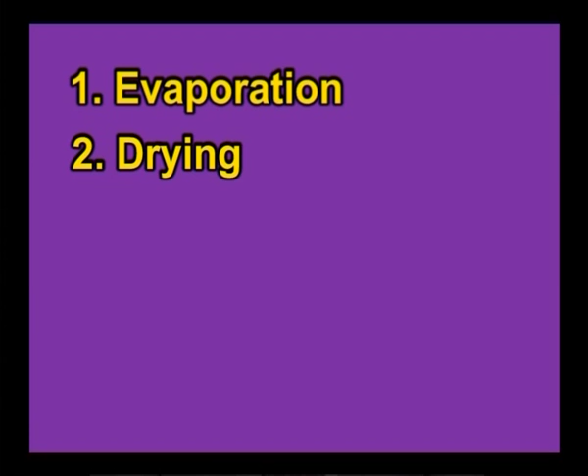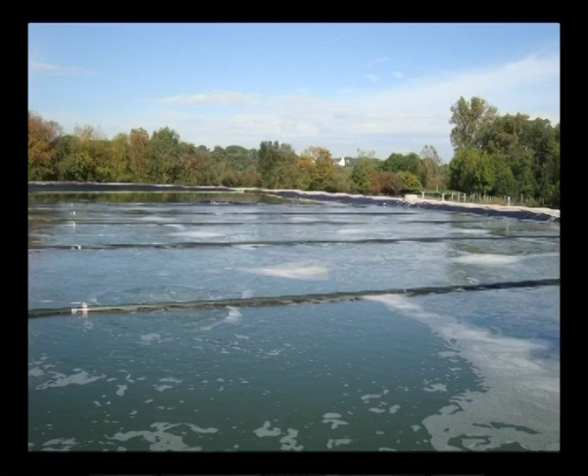Let us understand both the topics in this session in the following headings: evaporation, drying, thermal conversion, incineration, cleaning of flue gas and solidified outputs. The first topic, evaporation. Evaporation is a method used to concentrate non-steam volatile wastewater components. The evaporation plant contains a vapor condenser by which vapor and steam volatile compounds are separated from the concentrate.

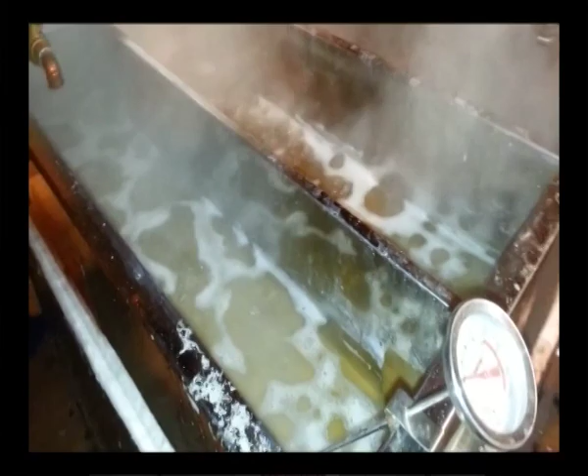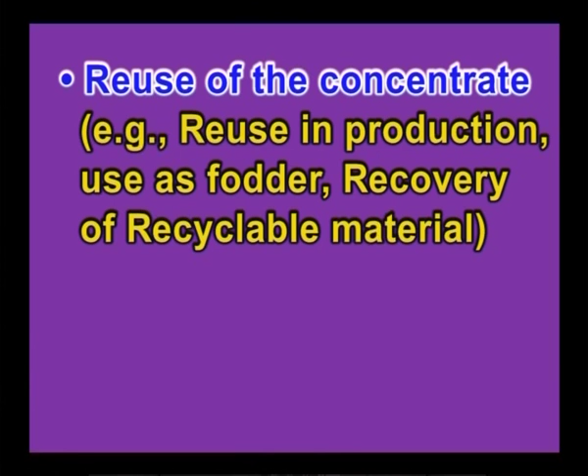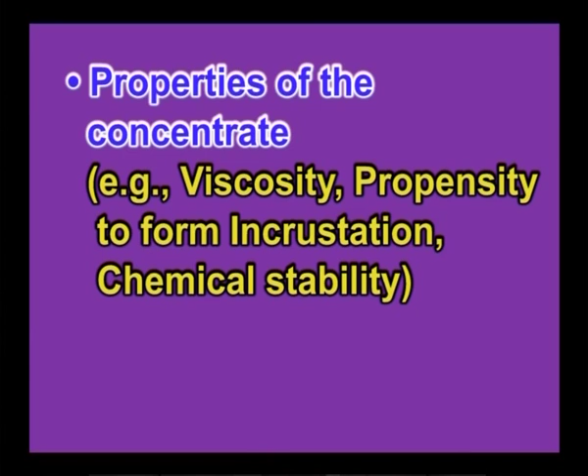While the concentrate is then recycled into the evaporator, the exhaust steam can be used for indirect heating of other evaporator stages. The degree of concentration of the wastewater components depends on different factors. For example, reuse of the concentrate, such as reuse in production, use as fodder, recovery of recyclable material; type of disposal of the concentrate, such as incineration or landfill; properties of the concentrate, such as viscosity, propensity to form incrustation, chemical stability.

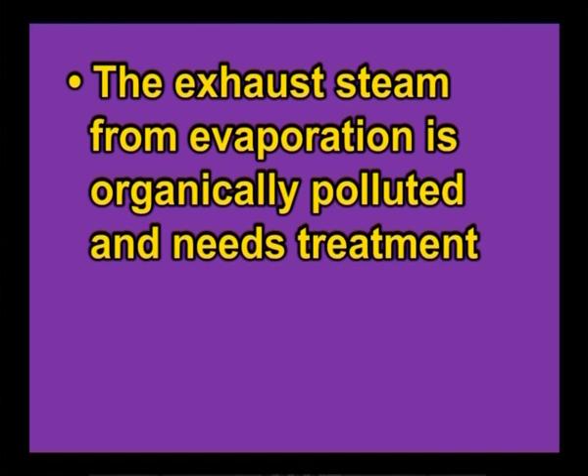Advantages of this method include: the residue can be reused as fodder and fertilizer, only a small area is needed, exhaust steam can be reused as energy, and it is considered state of the art in the food industry. Disadvantages of this method are that the exhaust steam from evaporation is organically polluted and needs treatment, and rather high operation and maintenance costs.

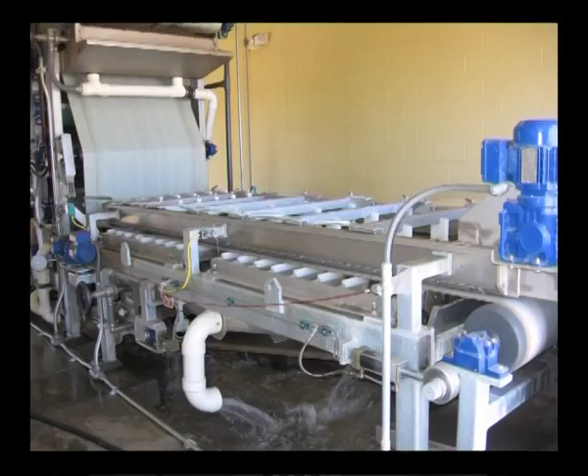Drying. Drying of a food material occurs when water vapor is removed from its surface into the surrounding space, resulting in a relatively dried form of the material. Drying differs from the dewatering process. In dewatering, liquid water is drained or squeezed out of the material. But during drying, the heat can be supplied in different ways: convection, radiation, conduction, microwave, radio frequency, or even joule heating.

The principle of drying, no matter what drying mechanisms are involved, can be generally expressed by the following surface vapor flux equation: N''v = hm (ρv,s − ρv,∞), where N''v is the vapor flux measured in kg per meter square per second, hm is the mass transfer coefficient measured in meter per second, ρv,s is the interfacial vapor concentration at the moist material surface, and ρv,∞ is the vapor concentration in the surrounding space that vapor travels into, measured in kg per meter cube.

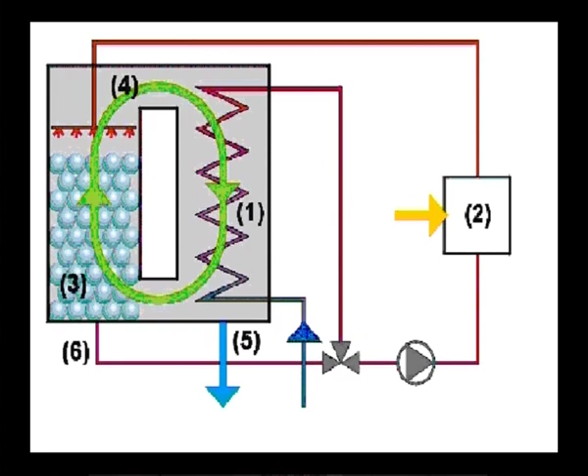hm is determined by the flow field around the material being dried, in meter per second, which may be viewed as a velocity of mass movement. When this vapor concentration difference is positive, vapor leaves the material and thus drying occurs. The reverse is the wetting or humidification process. The drying process as a whole has to involve the generation of vapor, transforming from the liquid phase in the moist material to the gaseous phase, on and within the moist material being dried, and the transport of the water phases towards outside of the material.

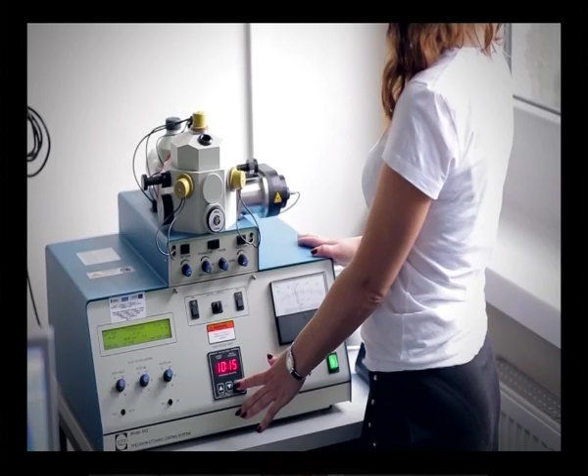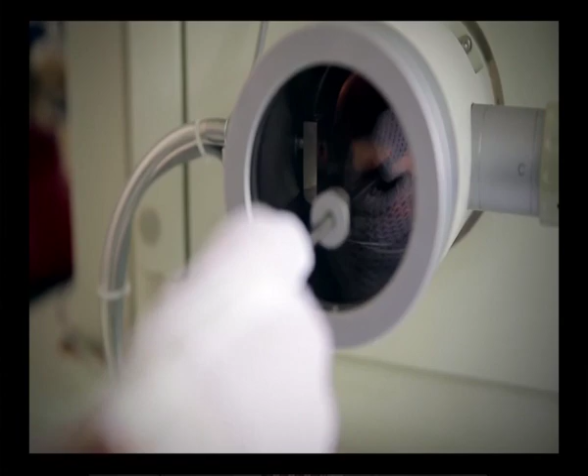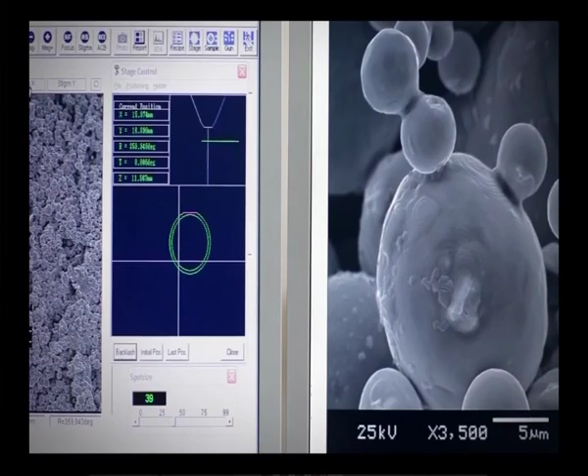Some debates are around how liquid water may move within the material structure. The microstructure of the food materials is particularly relevant to drying, as both liquid water and water vapor move within the structure. The microstructure, as far as the transport of heat and chemical species is concerned, is mainly made up of compounds such as protein, fat, carbohydrate, minerals and air. Porosity and tortuosity are usual characteristics. The material's composition and its affinity to water play a key role in water holding capacity and local evaporation rates.

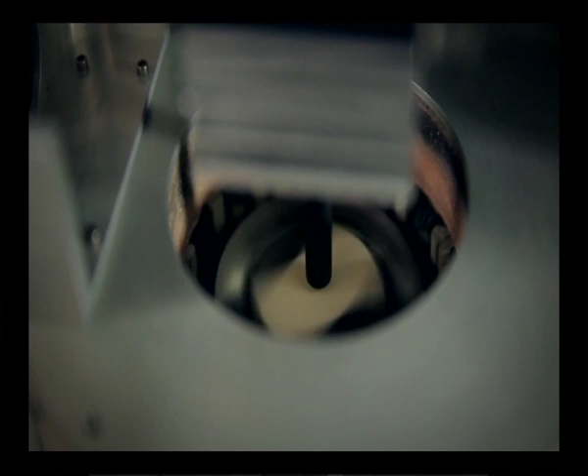Drying also creates a new microstructure as it progresses, and the spatial distribution of the microstructure characteristics, density included, is important in texture perception of the product and affects how it may be used as an ingredient for mixing into other foods. For instance, the reconstitution properties for food powders created by spray drying. Microencapsulation is employed to protect the active and beneficial ingredients such as probiotic bacteria during drying.

Drying is also preferably done at the lowest temperature possible for the same purpose of achieving higher retention of bioactivity. Bacterial cells or microorganisms are vulnerable in the drying process, especially when a high temperature environment is encountered. Drying may be viewed as a thermal processing stage. On the other hand, as mentioned above, preservation of the activities of the good beneficial bacteria such as probiotic bacteria becomes important when the drying process can be detrimental.

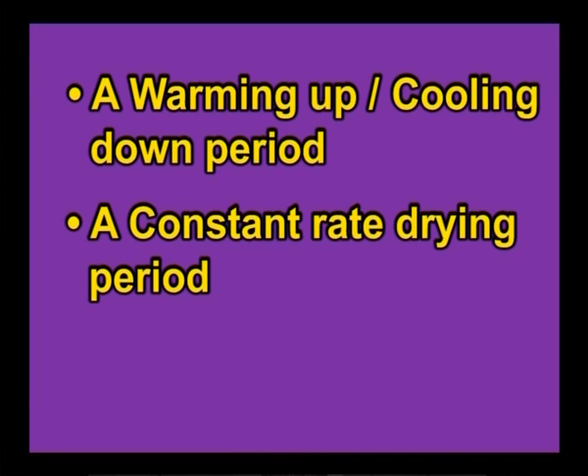There has been much research effort spent on understanding the fundamentals of drying and more complicated mathematical models published in the literature, but a concise introduction of drying still centers on the notion of three drying stages: a warming up or cooling down period, a constant rate drying period, and a falling rate drying period.

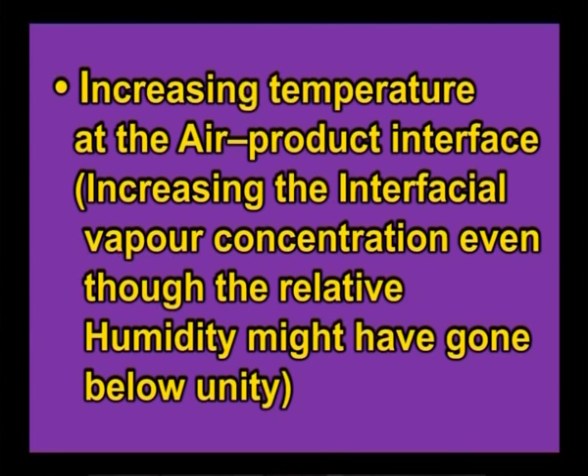The maintenance of the constant drying rate period may be due to two reasons. One is the increasing temperature at the air product interface, that is increasing the interfacial vapor concentration even though the relative humidity might have gone below unity. The other is due to the material's surface nature, where relative humidity can be kept constant for quite a long time.

There have been a large number of studies published in the past 2 decades on the drying of food and biological materials. In particular, the Page model appears to be the one that is the most successful in describing the weight loss versus time data obtained in a constant environment for drying.

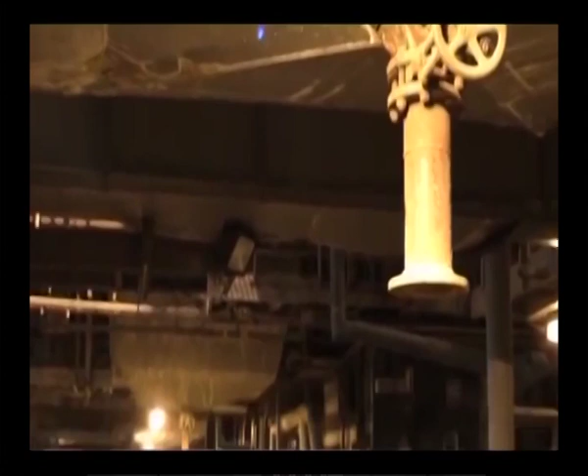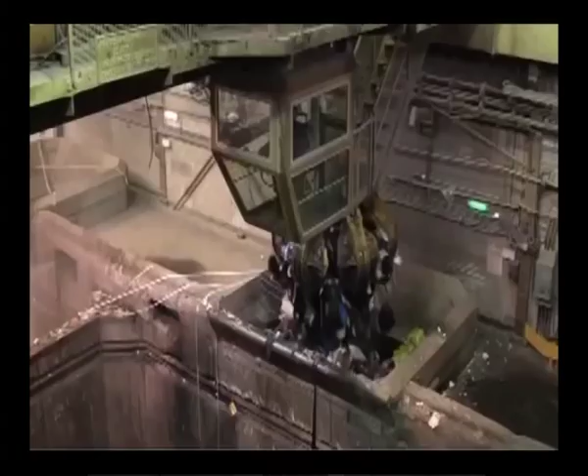Let us understand what is thermal conversion. The thermal conversion of solid waste includes transformation of wastes into gaseous, liquid and solid conversion products. The process also generates energy due to burning of waste materials. Thermal processing also results in waste volume reduction. Combustion or incineration, pyrolysis and gasification are the techniques employed for thermal conversion.

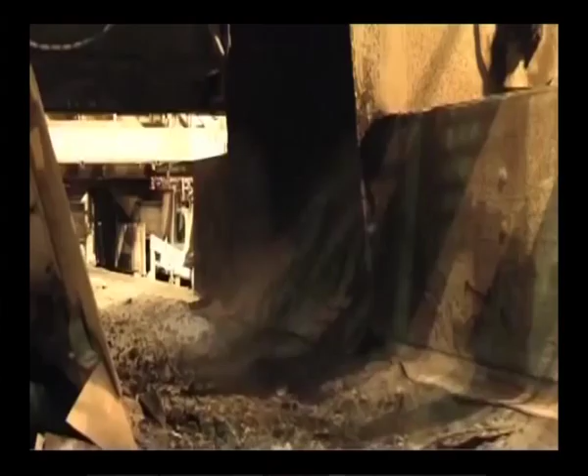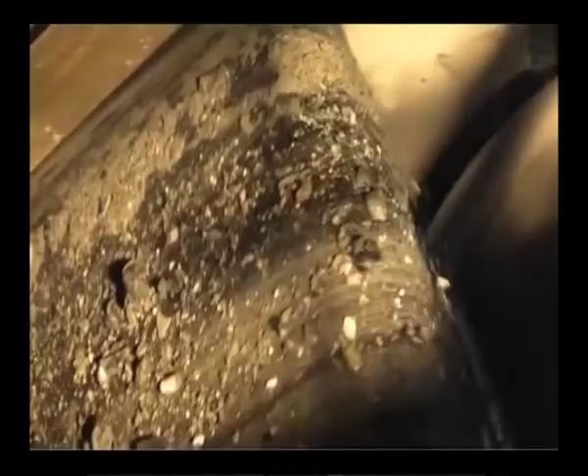A waste treatment technology which includes the combustion of waste for recovering energy is called incineration. Incineration coupled with high temperature waste treatments are recognized as thermal treatments. During the process of incineration, the waste material that is treated is converted into gases, particles and heat. These products are later used for generation of electricity. The flue gases are first treated for eradication of pollutants before going into the atmosphere.

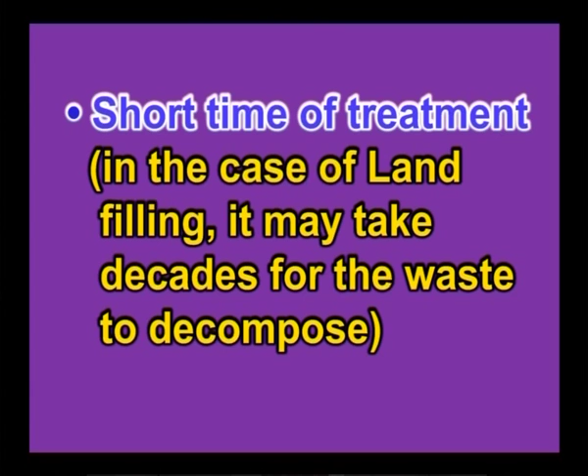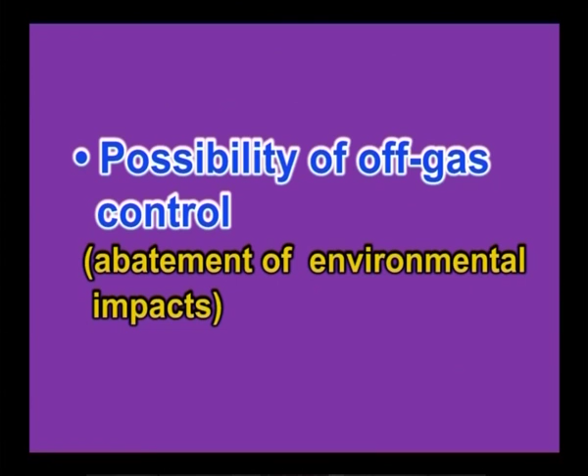Thermal treatment. In spite of the wide range of approaches to waste treatment in the food sector, in some cases thermal treatment is the most effective or the only one applicable. Compared to other disposal methods, it has a number of advantages such as short time of treatment. In case of landfilling, it may take decades for the waste to decompose. Another one is the possibility of treating hazardous waste, as for example in the case of animal carcasses contaminated by dangerous contagious microorganisms, possibility of off-gas control, abatement of environmental impacts, possibility of utilizing heat released by the oxidation process, that is waste to energy.

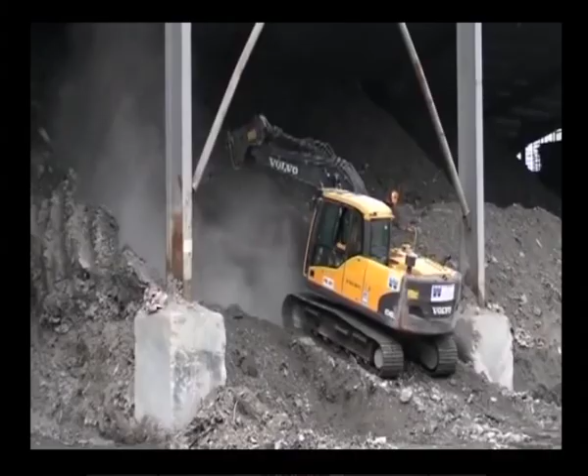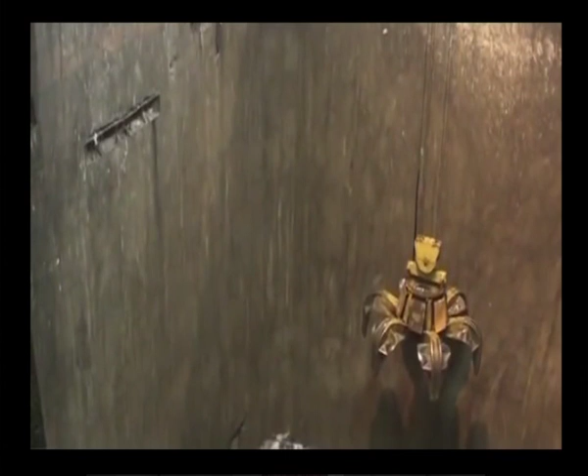The thermal treatment may be used for a wide spectrum of waste from solid to gaseous. The choice of suitable thermal treatment technology is then based on the type of treated waste and its characteristic properties. Examples described below include completely different technologies applicable to different types of waste. Incineration of solid residues with relatively low water content and free of hazardous properties may be performed in units very similar to biomass boilers. A typical example is provided by peach and olive pits. Due to the character of this waste, it is not necessary to equip the units with complicated flue gas cleaning systems.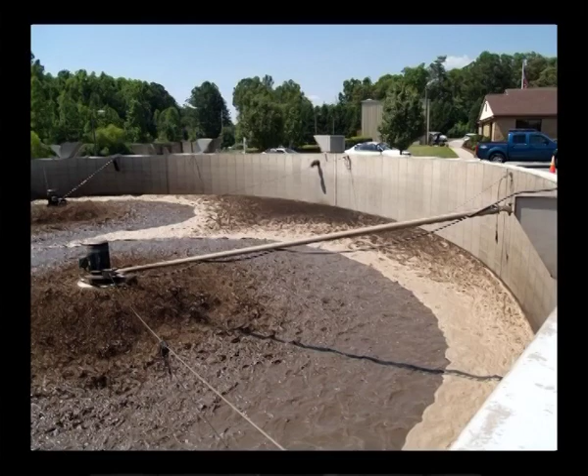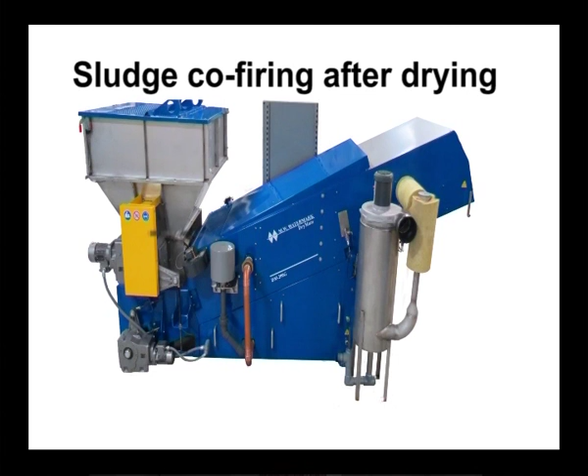Another example of solid waste is sludge, namely wastewater treatment plant sludge. In contrast to the latter example, high water content may be expected, thus requiring a completely different approach and technologies. One possibility is sludge co-firing after drying. One suitable process is cement and burned lime production, where an alternate fuel can be fed using a special feeder directly into the rotary kiln. In some cases, however, it is necessary to apply special sludge incineration technology. This is very often based on a multiple hearth combustion chamber.

For hazardous waste like some types of meat and bone meal, thermal treatment is the only alternative. In such cases, systems based on a rotary kiln and secondary combustion chamber are preferred.

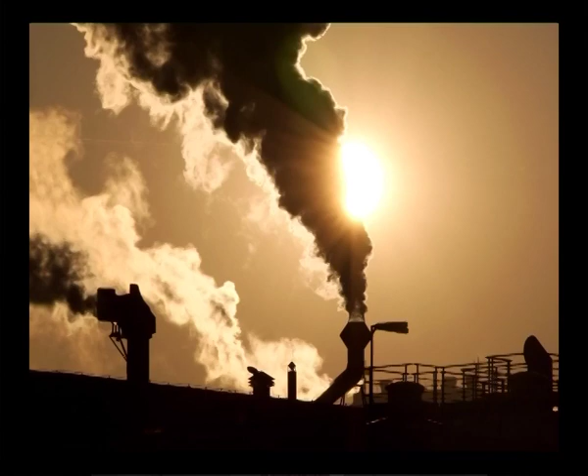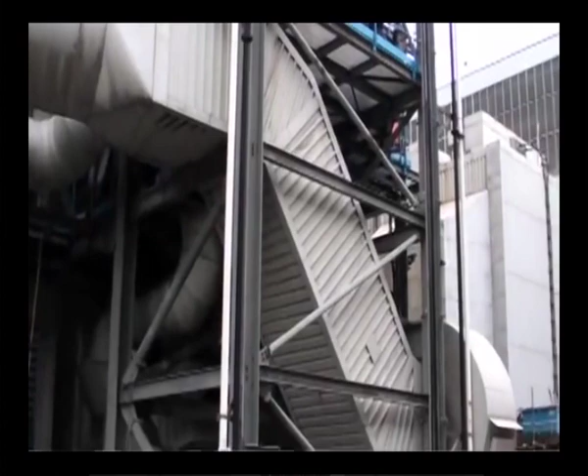Let us understand incineration. Incineration as a disposal method involves burning the trash. Sometimes this is simply referred to as thermal treatment, as a general category of high temperature treatment of trash material. This method can be used to transform waste into heat, gas, steam and ash.

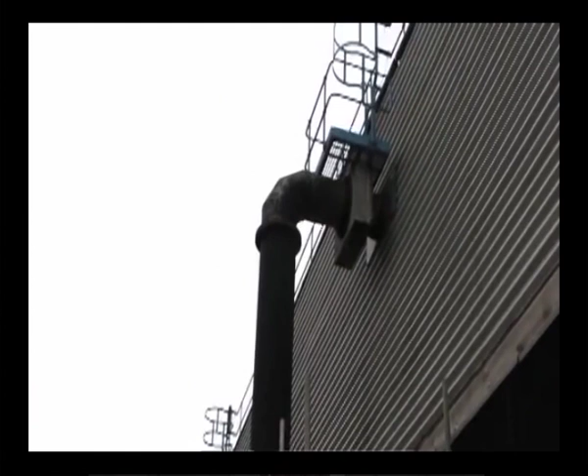One of the advantages of incineration is that with this method, refuse volume can be reduced by half or more, and it requires little usage of land. An incineration facility can be built in a small area to process huge amounts of waste. It definitely saves a lot of space compared with using a landfill only. This method is popular in countries like Japan, where space is a limitation.

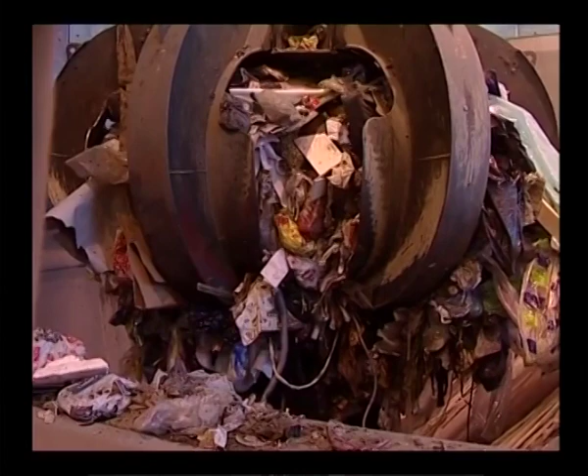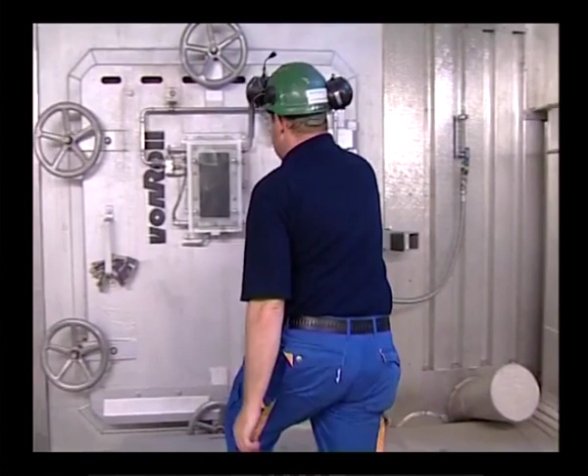Incineration of waste materials converts the waste into ash, flue gas and heat. The ash is mostly formed by the inorganic constituents of the waste and may take the form of solid lumps or particulates carried by the flue gas. Some incinerators generate energy from the burning of waste.

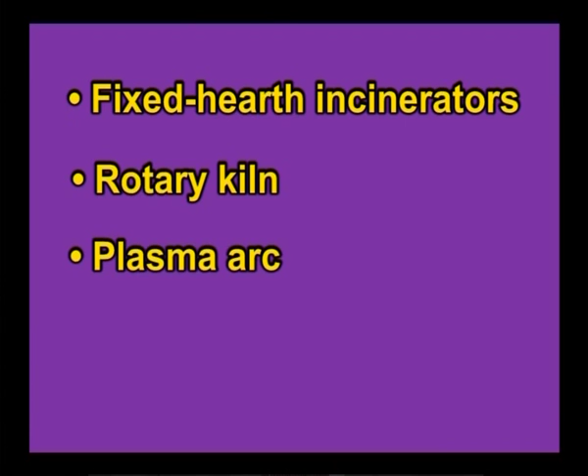These plants are called waste to energy plants. Incinerators reduce the volume of waste by about 90% and weight by 75%. There are 8 types of incinerators: fixed hearth incinerators, rotary kiln, plasma arc, liquid injection, fluidized bed, multiple hearth, catalytic combustion and static hearth incinerators.

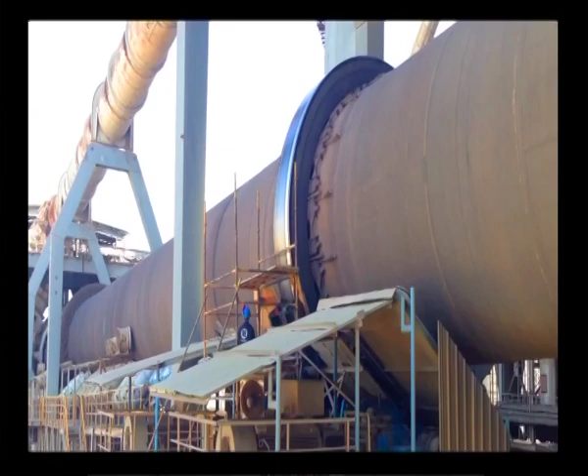In 1885, the US Army created the first garbage incinerator in the New York harbor. Let us understand these types of incinerators. Let us understand the first one, rotary kiln. The rotary kiln hearth system has been used for several hundred years in the pyroprocessing industry.

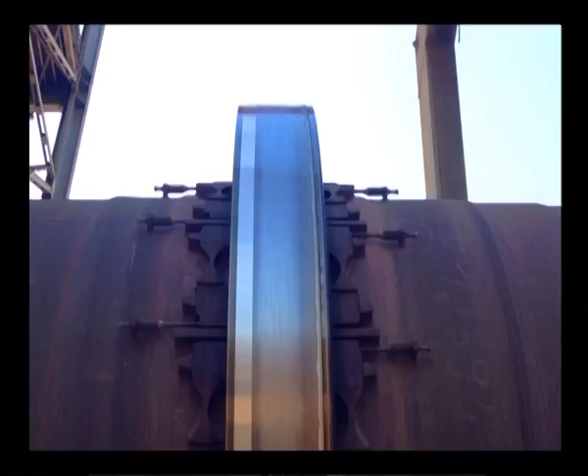The rotary kiln concept accomplishes 2 objectives simultaneously: moving solids into and out of a high temperature combustion zone and mixing and stoking the solids during combustion. In its classical embodiment, a kiln is comprised of a steel cylindrical shell lined with abrasion resistant refractory to prevent overheating of the metal. A kiln is generally inclined slightly toward the discharge end, and the movement of the solids being processed is controlled by the speed of the rotation.

In some instances, special provisions have been made for air cooling or water cooling the kiln shell, thus eliminating the use of refractory. For example, a steel kiln cooled with external water sprays known as the Lantz converter was developed by pyrolysis application in the mid 1960s. In the later 1970s, a new kiln technology emerged involving a water cooled kiln cylinder fabricated of steel boiler tubes welded together and manifolded for the introduction of feed water and withdrawal of steam.

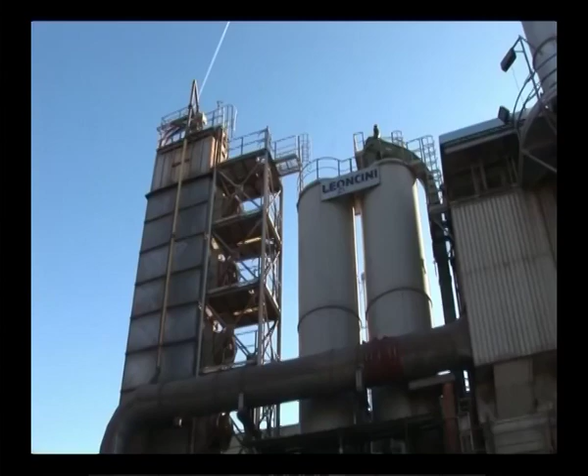The other one is the plasma gasification. Plasma gasification is another form of waste management. Plasma is primarily an electrically charged or a highly ionized gas. Lightning is one type of plasma which produces temperatures that exceed 12,600 degrees Fahrenheit. With this method of waste disposal, a vessel uses characteristic plasma torches operating at plus 10,000 degrees Fahrenheit, creating a gasification zone till 3,000 degrees Fahrenheit for the conversion of solid or liquid wastes into a syngas.

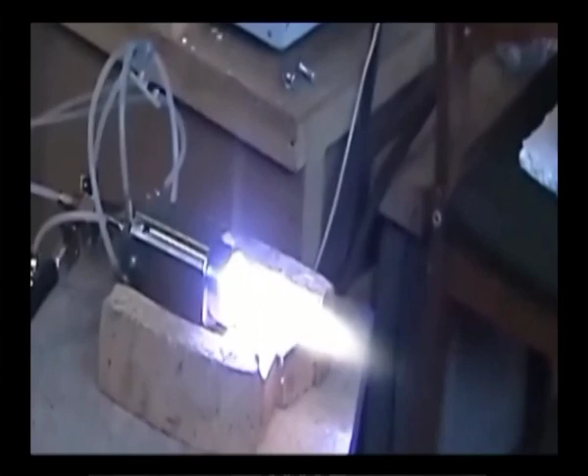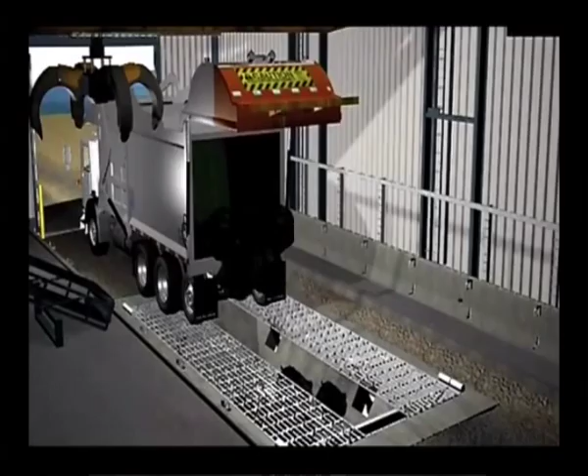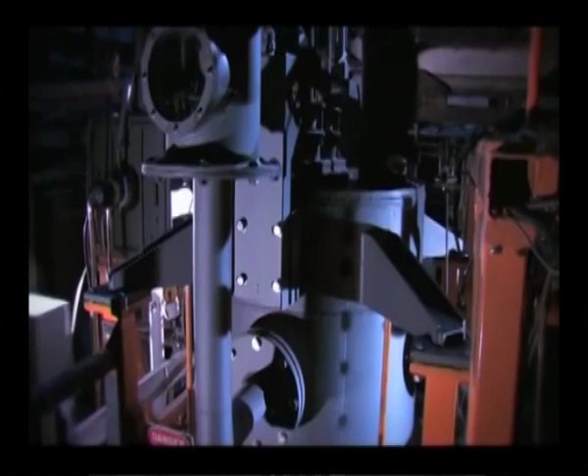During the treatment of solid waste by plasma gasification, the waste molecular bonds are broken down as a result of the intense heat in the vessels and the elemental components. Thanks to this process, destruction of waste and dangerous materials is found. This form of waste disposal provides renewable energy and an assortment of other fantastic benefits.

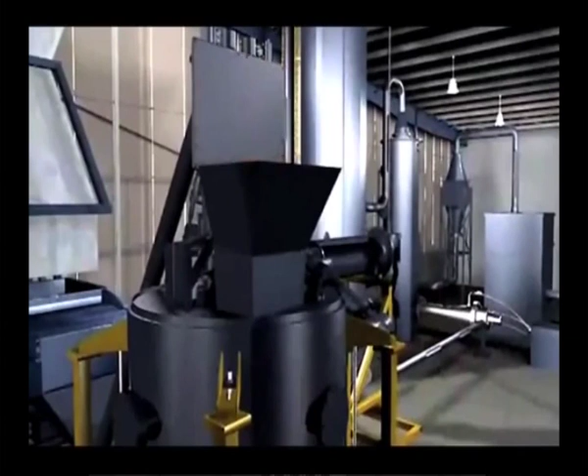Plasma arc incinerators ionize inert gases via an electric arc between 2 electrodes. This plasma creates an extraordinary amount of heat ranging from 3000 to 7000 degrees Celsius. The extreme heat can easily break down organic compounds into their basic atoms, which later recombine to form gases such as carbon dioxide. Inorganic material is left as a stable, leach resistant slag. Concerns surrounding plasma arc incineration include ensuring that gas emissions are minimal and clean before being released to the atmosphere.

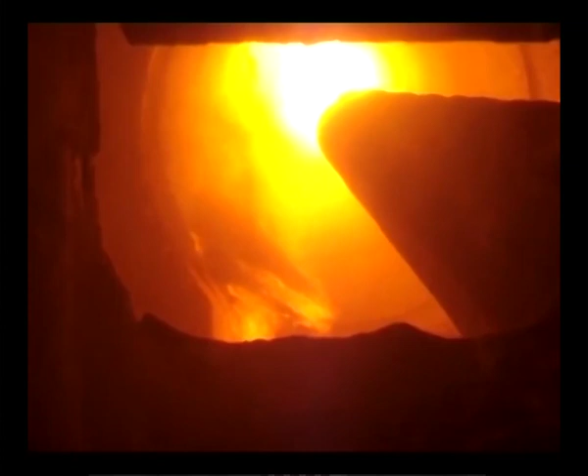Another type is the fluid bed systems. Fluid bed incineration systems, relative to bubbling fluid bed applications in burning biological wastewater sludge and circulating fluid bed applications in burning hazardous wastes, are widely employed. These two waste management areas were the dominant applications of fluid bed technology in the United States at the beginning of the 1990s, but several applications for municipal solid waste could be found in Japan and Europe.

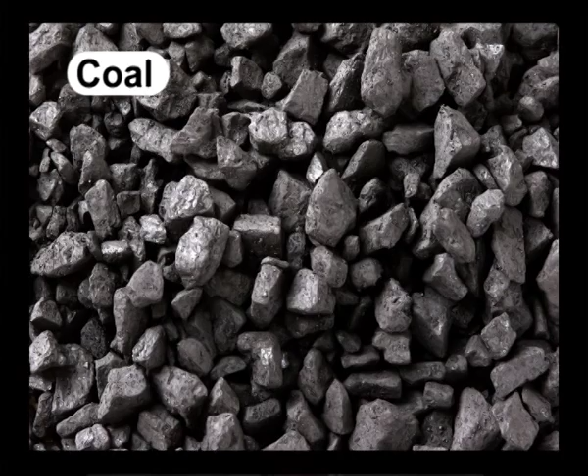In order to provide a feed bed with relatively homogeneous composition and size, almost all solid waste fired in bubbling fluid bed or circulating fluid bed units is pre-processed or at least made somewhat more homogeneous through waste separation at the point of generation. Both bubbling fluid bed or circulating fluid bed furnaces can accept other fuels such as wood chips, coal or chipped tires. By acquiring these relatively clean alternate energy sources when the prices are favorable, energy revenues can sometimes be increased significantly with little increase in maintenance and operating cost.

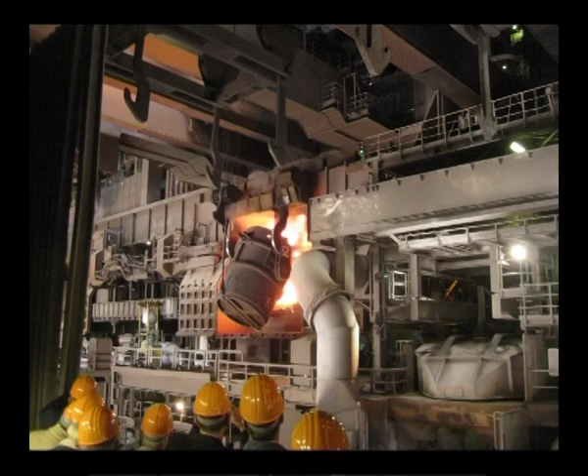The other type is the stationary hearth system. Those incinerator furnace systems that operate without grates include the stationary hearth, rotary hearth and rotary kiln. The stationary hearth is usually a refractory floor to the furnace, which may have openings for the admission of air under slight pressure below the burning material on the hearth, in the manner of the blacksmith's forge.

In the absence of underfire air ports, air is admitted along the sides or from the top of the furnace and combustion proceeds in the same surface burning manner as in the bonfire, but with improved conditions due to the re-radiation of the heat from the surrounding furnace walls and roof. Unless the refuse being processed provides a porous burning mass, it is necessary to provide manual stoking with slice bars to stir the mass of refuse in order to achieve a reasonable burning rate and degree of burnout.

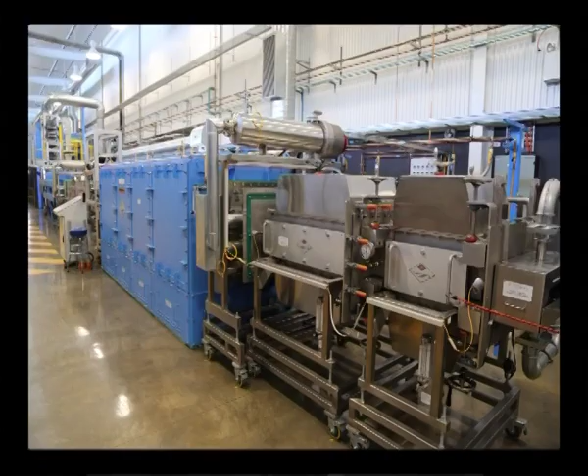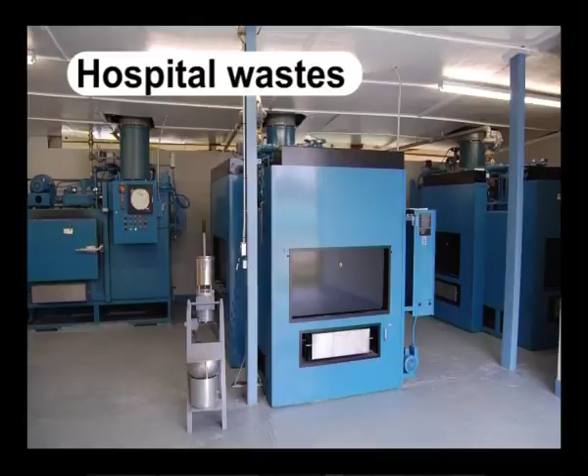Stationary hearth furnaces are used for most commercial and smaller industrial incinerators. They are also used almost exclusively in crematories and for hospital wastes. For the latter applications, auxiliary gas or oil burners are used to maintain the furnace temperature in the range of 650 to 900 degrees centigrade in the presence of adequate quantities of oxygen from air, well dispersed throughout the

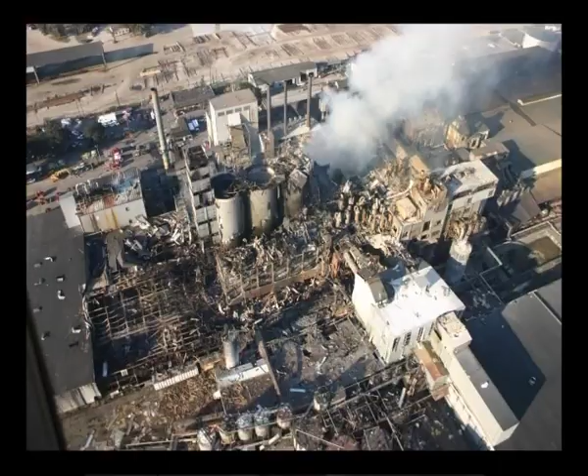gas. In burning such high moisture waste, primary chamber burners are needed to ensure complete oxidation of combustible solids and vapors for the elimination of smoke and odors. Confident smoke and odor control requires auxiliary fuel burners under automatic temperature control in a secondary combustion chamber.

Another type is the moving grate system. The incinerator plant used for treating municipal solid waste is the moving grate. This grate is capable of hauling waste from the combustion chamber to give way to complete and effective combustion. A single such plant is capable of taking 35 metric tons of waste every hour for treatment. Moving grates are more precisely known as incinerators of municipal solid waste.

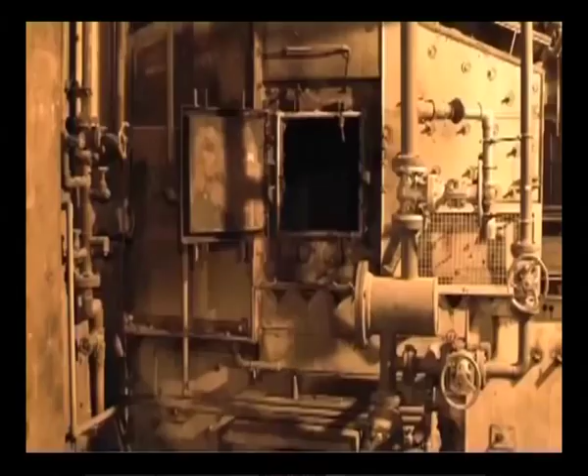This waste is poured in the grate with the help of a crane. From here, the waste has to move towards the ash pit. Waste is further treated and water locks wash out ash from it. Air is then flown through the waste and this blown air works for cooling down the grate. Some of the grates are cooled with the help of water.

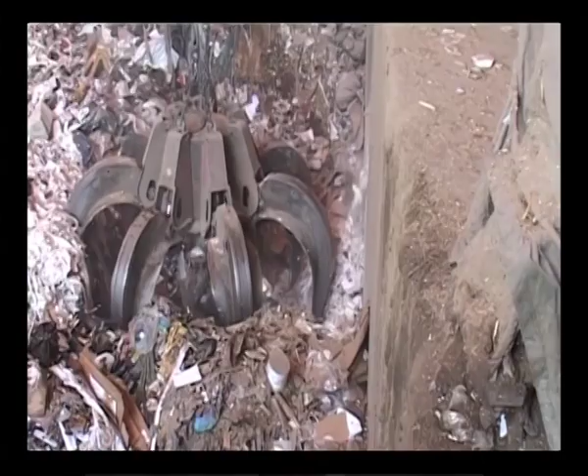Air is blown through the boiler another time, but this time comparatively faster than before. This air helps in complete burning of the flue gases with the introduction of turbulence leading to better mixing and excess of oxygen. In some grates, the combustion air at fast speed is blown in a separate chamber.

The European Waste Incineration Directive is of the view that an incineration plant must be designed so that the operating worker must know that flue gases are reaching the temperature of 850 degrees centigrade for 2 seconds. This would ensure complete and required breakdown of toxins of organic nature. In order to achieve this, backup auxiliary burners must be installed.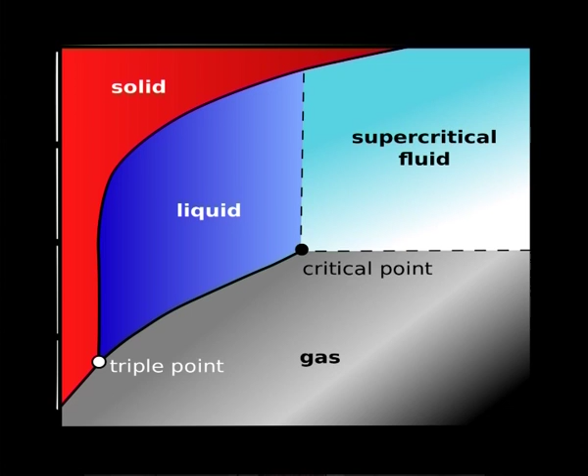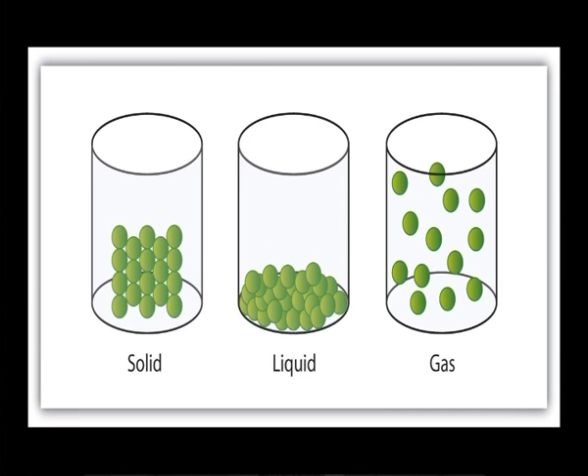We need to have a system analysis for the successful incineration process. The basic information used in the analysis of combustion systems can include tabulated thermochemical data, the results of several varieties of laboratory and field analysis, and basic rate data. Guiding the use of these data are fundamental relations that prescribe the combining proportions in the molecules and those that indicate the course and heat effect of chemical reactions.

The last being the cleaning out of flue gas and solidified outputs. A number of processes are involved for the cleaning up of flue gas. The mixture of flue gas is collected by means of particle filtration, and this filtration is conducted using electrostatic precipitators and baghouse filters. Baghouses are very effective for fine particles.

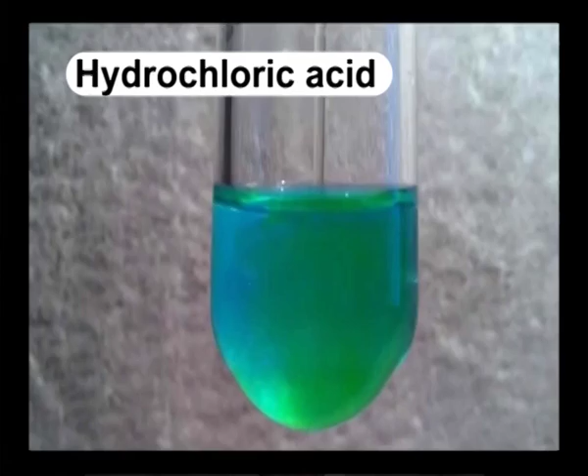The next step of the processing and cleaning of the flue gas is processing by scrubbers, which are critical for the removal of hydrochloric acid, nitric acid, mercury, hydrofluoric acid, lead and residuary heavy metals. With the reaction of lime, sulfur is converted into gypsum. The wastewater which comes out of the scrubbers is then passed through a wastewater treatment plant.

Desulfurization is a process that is used to remove sulfur dioxide with limestone slurry injection directly into the flue gas. The nitric components of gases are reduced with catalytic reduction with the help of ammonia application. Heavy metals are removed with the help of active carbon injection. Particles are collected at the filters.

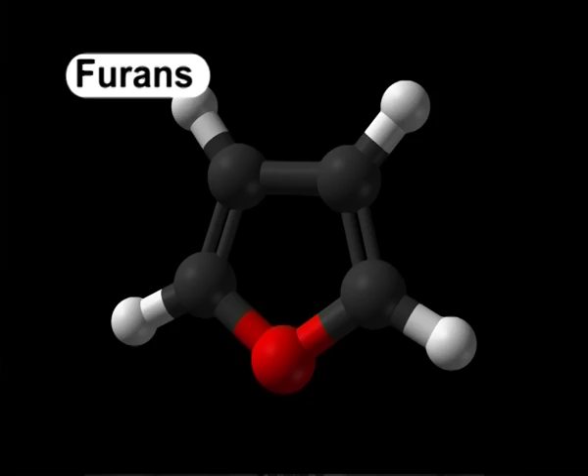The heavy metals which are contained in the fly or bottom ash are lead, cadmium, zinc and copper. A small amount of furans and dioxins are also produced. It is to mention here that bottom ash seldom has heavy metals in it. Fly ash is hazardous, while bottom ash is not that dangerous or injurious to health.

In conclusion, incineration is considered to be the best method of waste management over landfill, provided it helps in recovery of energy from the solid waste. Even though landfill is the most commonly practiced form of waste management, its contribution to the pollution of groundwater and air through leachates and its huge requirements of land have made incineration most suitable for management of selected solid wastes.